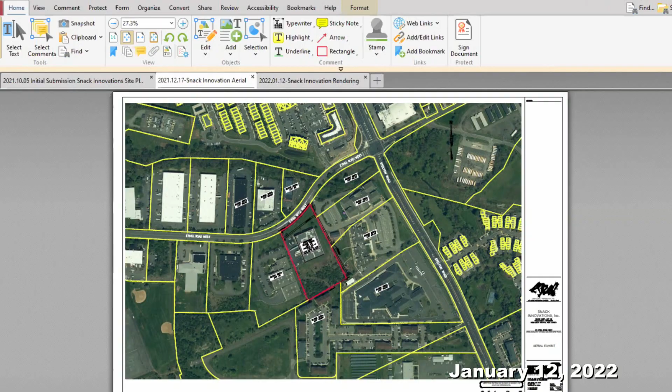Can you describe for the board the proposed building additions, development and infrastructure improvements under this application? Yes, so this second exhibit we're calling an exhibit rendering, number one, it's a colored rendering of the site plan that is in the site plan package submitted for the application. This is actually rotated 90 degrees. We're still on the first exhibit, the aerial. Did you switch it? Let me do that real quick.

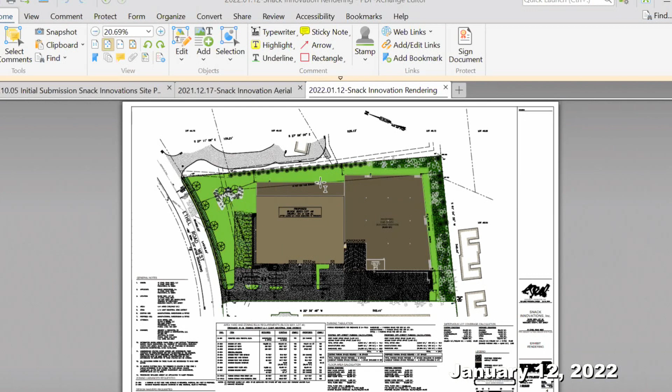All right, so describe the additions to the existing building. Are you able to see this now? Yes. Okay, good. So Ethel Road is running down, westbound down on the sheet, and we're basically adding...

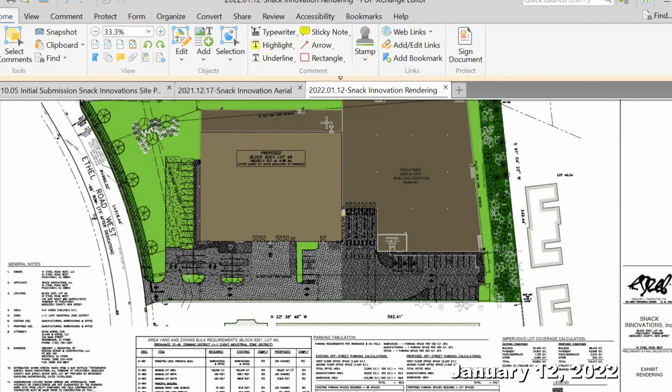51,019 square feet of new addition to the building, giving us a total footprint in the post-construction condition of 86,419 square feet. So this portion here, to the left of the building, if you're building from the street, is part of the addition, and then there's also an addition in the back, which is larger here.

There's a notch in the building midway back, which is for the new loading docks, so there's substantially more adequate circulation for the trucks. Typical distance from the face of a loading dock for the largest vehicles to the curb would be 130 feet. We're providing 135 feet now.

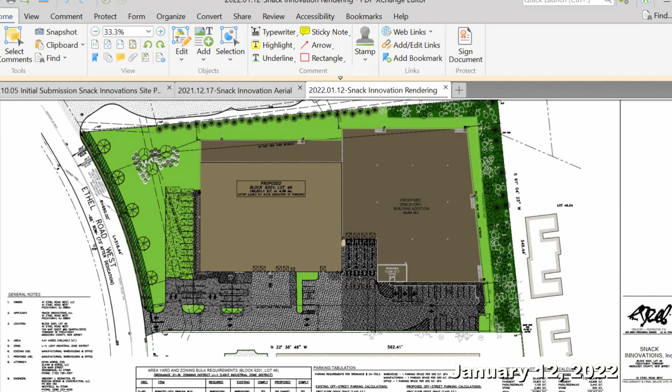Each of these 4 spaces now has adequate circulation ability. We're also adding parking. There's a reconfiguration of the parking here, which gives you 8 spots there and some spots in the back. We're providing a total of 42 spaces, with 15 remaining banked.

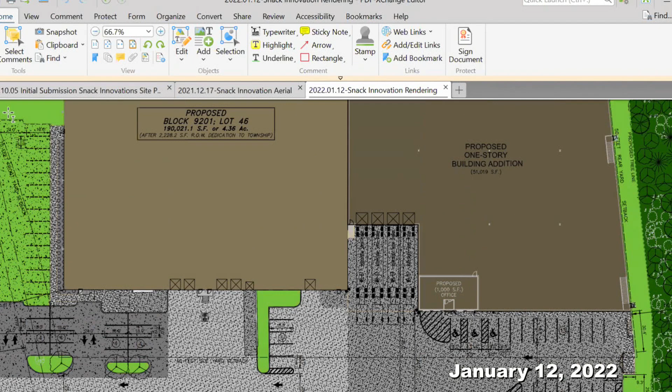So, total 42 spaces, 15 are banked. The banked spaces are seen here in the front shown as green. There are 15 spaces right here.

There are retaining walls proposed starting about this point of the site, back to the rear part of the parking area, in order to retain a good portion of the site. Since the site slopes from south to north, there's a good bit of earthwork removal that will occur. The building itself, its structural walls, will function as retaining walls, which is why you can see these interior stairs that allow people to come up off the warehouse floor and exit out through the building or enter.

We're adding a new 1,000 square foot office space in the new addition to supplement the 2 office spaces that already exist, which will remain.

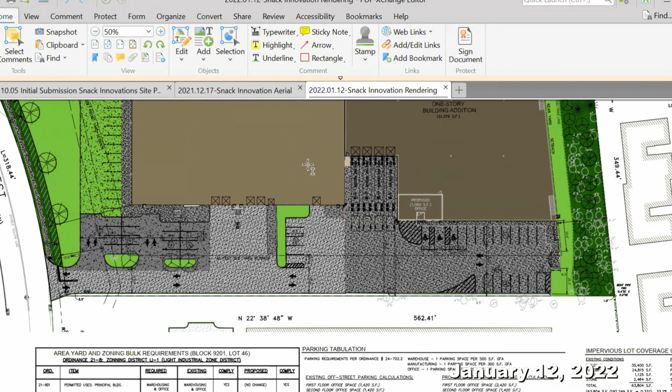The building breakdown: currently there's approximately 24,380 square feet of warehouse and 9,600 square feet of manufacturing, with 2,840 square feet of office, totaling the existing condition. In the net end condition, there's more square footage available for warehouse, 22,105 square feet of manufacturing, and 3,840 for office space. That's increasing warehouse ability by about 40,000 square feet and manufacturing on site by about 12,000 square feet, so it improves their ability greatly to function as they desire.

The site's been designed in accordance with NJAC 7:8, the state drainage regulations, which were recently updated in March 2021. We have to make accommodations for groundwater recharge, water quality, and water quantity reductions, and everything about our design complies with that.

We've also improved landscaping. We have several comments from the professionals about modifications in landscaping, which we believe will be no problem to accommodate in compliance with the resolution. We've added lighting around the site so that there's adequate lighting for the parking areas and loading and circulation around the site. That's the main gist of the improvements.

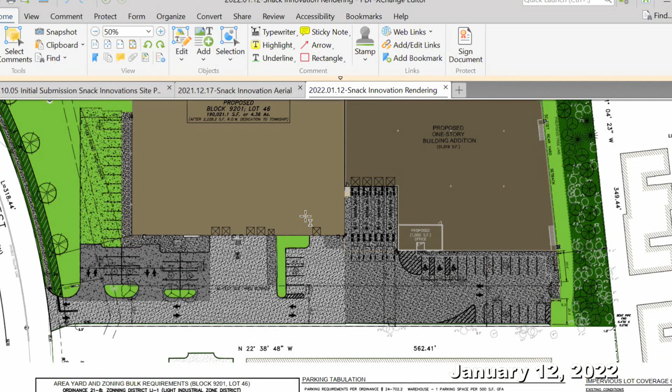Okay, I believe that handles that last memo. Madam Chairwoman, if there are any questions of Mr. Tyner at this point from the board, from the various professionals who issued the memos, we would invite those now.

Two things I might want to mention were the two variances, just where they're located. I kind of skipped over that, got a little discombobulated when the exhibit wasn't coming up. But the 40-foot side yard setback line is here, and there are two violations of that, but the more excessive is the 25.1 foot setback here. So that's where that variance comes in.

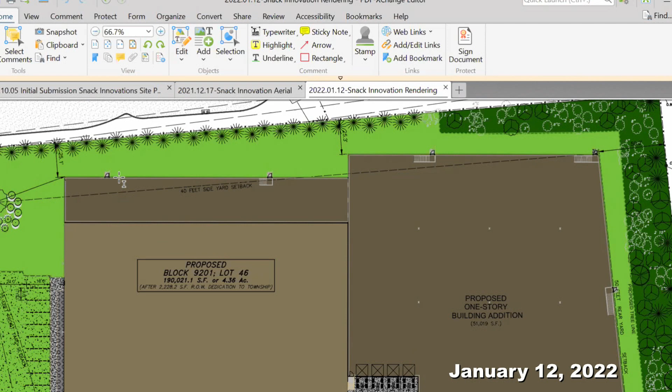And then the other is the building coverage, which is permitted at 45% of the site. And in fact, our original design was 45%, but with the dedication of 7 feet, it becomes 45.5. So really a de minimis overage, would that be your testimony? Yeah. Okay, thank you for that additional testimony.

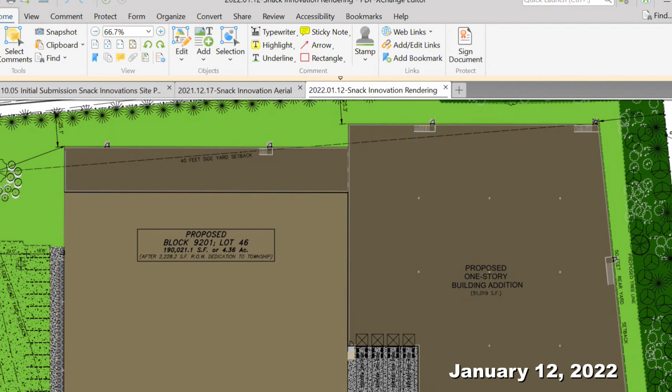Again, if there are questions of Mr. Tyner, he will also remain available through the entire hearing in case an engineering question comes up later based upon your further review or the testimony of other professionals. Board members, do you have questions of this witness? Mr. Tyner?

Madam Chair, this is Gabrielle. I did have just a couple of questions, and I'm going to start with the electric car stations. Mr. Tyner, you said that these would be, quote unquote, make ready. And with that, I kind of briefly looked over our ordinance.

I don't know if there's any detail, and if Ms. Corcoran wanted to chime in. When we close out after we do an approval, we make sure that all of the requirements of the approval are met. My question is if they're only make-ready stations, how do we approve an application where the electric stations aren't actually put in place and only the apparatus to then, quote unquote, plug and play?

I'm not sure if Dawn would answer that better. And I guess that question isn't really for Mr. Tyner, except to say that we may not want to land in that space. Maybe we will. I'll ask my other question now, which is, and I apologize if you already said it, did you agree to adjusting the street sign? And I apologize, Mr. Morse, if you had already answered that.

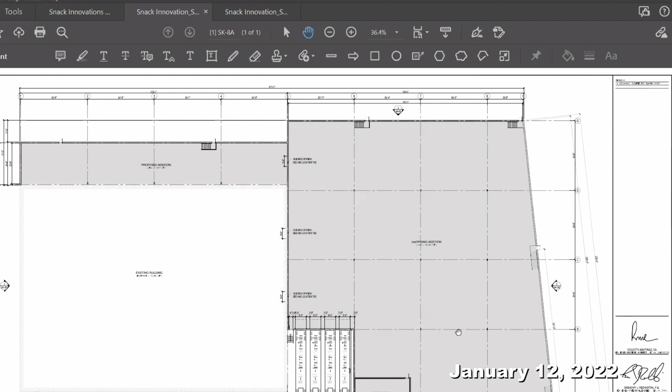Did you have a share screen rendering you wanted to put up while you testified? Let me share my screen. Can you see the screen? Yes, we'll call that A3. What is that? This is SK 8A, the proposed first floor plan.

This depicts the existing building in white, a portion of it, and depicts in gray the areas where we want to add. This is where the existing building currently ends, and we're planning to make an addition in this area to provide 4 loading docks, a small office area, and the rest allocated to some production and mostly warehousing.

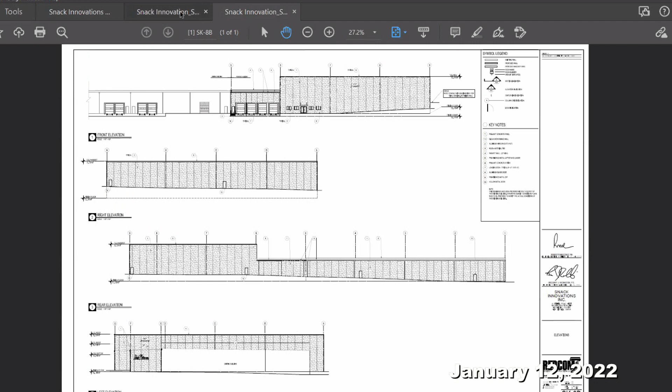Now you have an elevation rendering with some colors you'd like to share for the board, is that right? Yes, I have the renderings. This is the proposed view, if you look at the floor plan again, you see here the loading docks, that's the angle I'm taking. All right, so we'll call this angle A4 then. Yes, sir.

In response to the memo we got from the township, we're actually mimicking the existing building. The building is currently a 2-tone building, it has 2 grades, natural grays, one lighter, one darker, expressed with a stripe around a third of the building, where I have the cursor right now. This is where the existing ends, and this is exactly the same color paint and accents, which we're continuing to make the new building mix better with the existing, because our building is higher, so you'll see that difference between the two.

Now you also have another color rendering of the existing building, I think from the street view. Of the proposed, actually. I have another angle, let me go back to the first one, so the other is from this angle. Let me show you the render. Right, we'll make that A5, and that's what elevation? That is the right elevation.

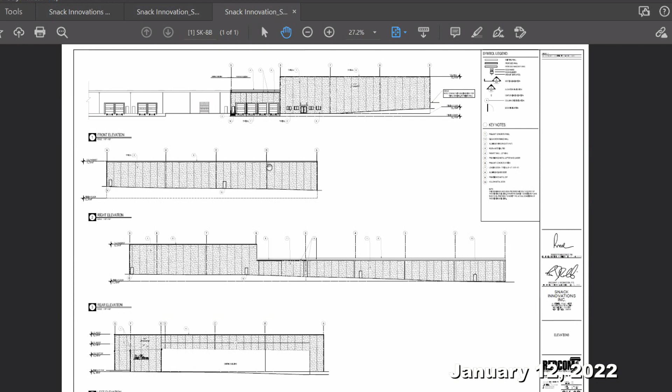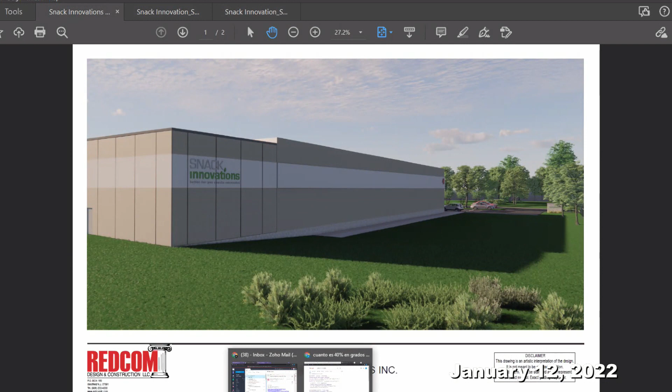Now, just so it's clear, we had two comments relating to architectural issues. One was in the CME memo requesting that the color scheme and materials of the facade of the proposed building be discussed, and that those color schemes be done so there's continuity between the addition and the existing building. Based upon what you described, you will maintain that color and appearance so there's visual continuity, is that correct? Absolutely, that's the whole intention of this. We are continuing the existing building.

That includes, there was another comment in the Piscataway internal house memo, that an accent band be added for aesthetic purposes. And of course we're prepared to continue that on the building addition as well, correct? Yes, you can see it on all four sides of the building.

Very well. So to sum it up, the building addition facade treatments will be neutral and designed so that there's continuity, so that the addition looks like the existing building so that it flows. Is that correct? Correct. All right, so I'd have no further questions of Mr. Martinez. If there's any questions of an architectural nature from the board or its professionals, we would invite them now. He'll also remain until the conclusion of the hearing in case something comes up.

I'm satisfied, there's continuity here. It's the way you look at the visual, it comes around the building. Thank you. Okay, great.

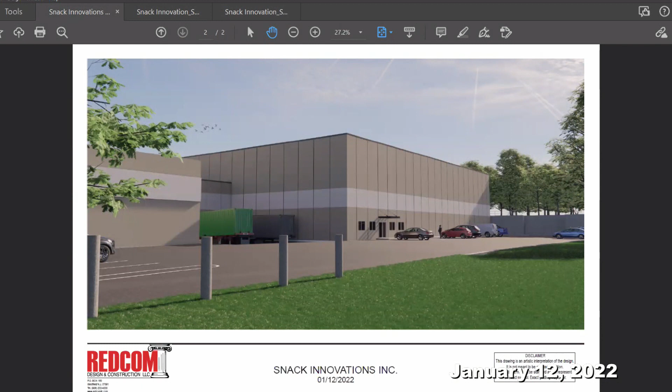Again, no further questions unless there are those of the board or the public. I would call my next witness. Madam Chair. Oh, you're on mute. That's right, okay. Does the board have any questions? Any other questions of this witness? Hearing no response from the board members. Did we open it up to the public for this witness yet? No ma'am. Ms. Buckley, would you open it up to the public please, to see if they have any questions of this witness? No one raised their hand, Madam Chair. Thank you, okay, you may proceed with another witness if you have one.

Mr. Martinez, you can stand down but stay on board. Next I would call John Ray, who is our traffic engineer. Mr. Ray, can you please raise your right hand? I'm not seeing him yet. I'm here. Yep, there you go. Oh okay. Do you swear that the testimony you will give will be the truth and nothing but the truth? I do. Thank you.

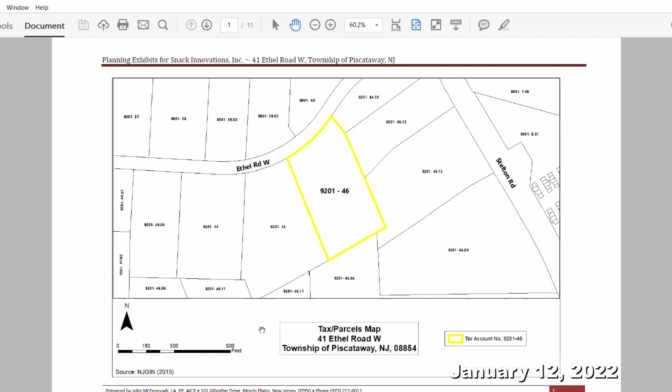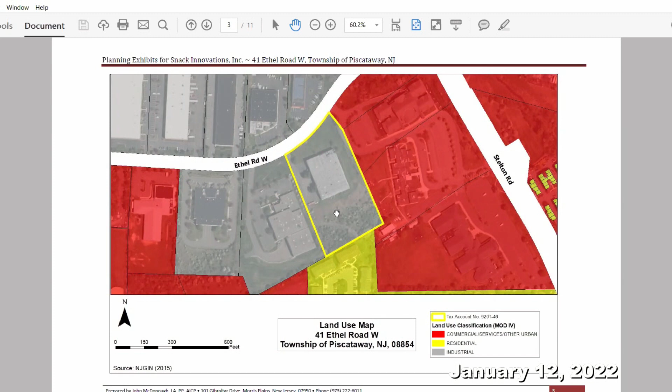So absolutely no relief being sought for what I'll call the edge, which is always a critical and sensitive area between non-residential and residential. So while the building is expanding, it is preserving the edge between those two land uses. Next, we're going to be on A9, which we're calling a zoning map.

This simply shows a reflection of the established land use pattern. Subject site in the middle, everything around us in gray is the LI1 zone district, where the proposed use has been both recognized as a valid permitted use and a lawfully existing use, and continuing as a permitted use as well. Importantly, we're dealing with an enhancement to a permitted use in the zone that has been here already—not a change of use. Now, immediately adjacent is your GB, general business district, and then backing up to that residential district, which does have a buffer requirement adjacent to it, which the applicant is complying with.

I'll go through the list of zone conformance, but you're going to see that there is substantial compliance here, not only with your use requirements, but also your bulk requirements as well that control the intensity of use on a piece of property. And you'll see the relief that the applicant is seeking here is really relatively modest.

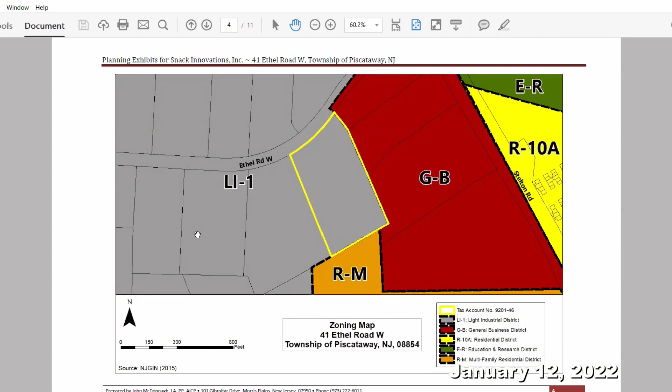Importantly, the applicant is going to put this addition off the back with the notch for four brand new loading bays that are certainly going to take the load off of this center point right now. So while we're not foreclosing the right to use those bays, certainly the relief valve is there by directing the traffic to a much more accommodating area in the back of the site.

So this is what you have there now. It's a building, the core is going to stay intact. The applicant is looking to put an addition off the back and then a small addition off the side as well, which again is going to be spot on with what is allowed from a zoning standpoint—and we'll get to that shortly—and also with respect to the bulk requirements, and certainly improved parking and circulation, as you just heard through Mr. Ray.

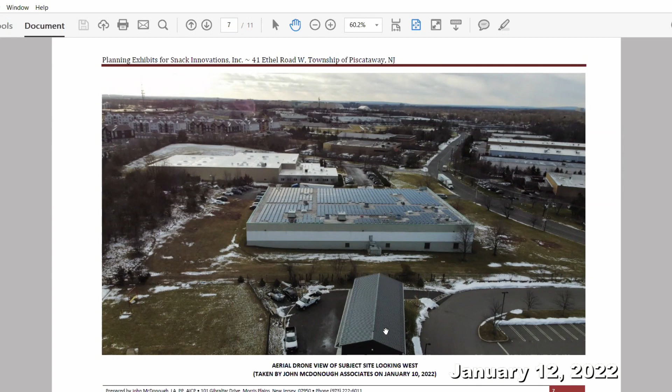I lost count—is this A12 or A11? A12. Okay, so A12, we're now looking west. This is the opposite view of what we just showed you, with Ethel Road on the right there, looking back at the building. This is the portion of the building that's going to come a little closer to the property line. Because of some pinch points that you saw in Josh's exhibits—not the full extent of the yard, but just little encroachments—the applicant is looking for relief there. It's going to be mitigated by landscaping, but it is essentially non-residential against non-residential. This is not an encroachment that's going up against the residential use, which would be to the left from this particular vantage point.

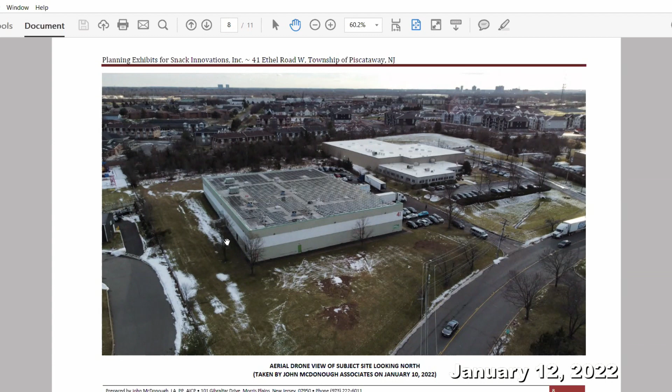A13, we've now spun around and we're looking at a view to the north. So we've got Ethel Road in the foreground here. Basically what you see in the front is what you'll get. The improvements are for the most part concentrated on the side with parking modifications and in the rear, and then on this side on the left here as well, where again we do have that relatively modest setback relief.

A14, did I skip one? A14? You're on 14.

A14, I just took the drone and pulled it back a bit to give you some context, looking to the east. Again, our subject building, with the adjacent building in the foreground, getting more of a sense of the surrounding landscape. I wanted you to point out one thing before you continue your testimony.

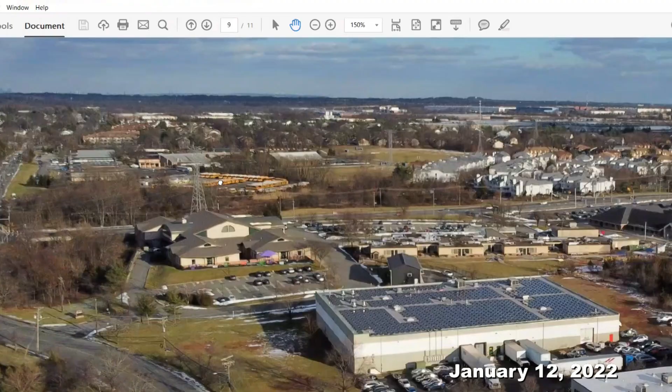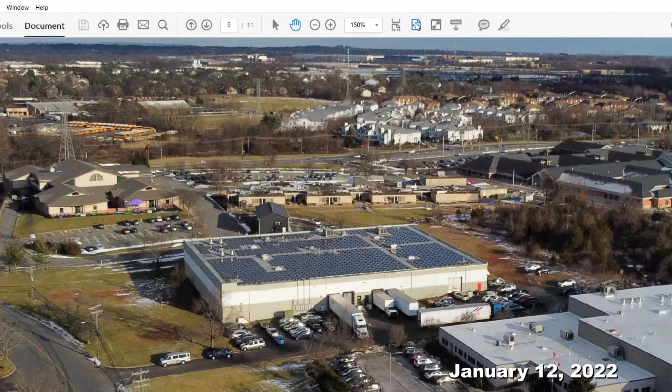The roof, those are solar panels, correct? Those are solar panels up there, and they're to remain. So we know Piscataway places high emphasis on green initiatives, and this is already cooked into the building that's out there. There were also great comments about EV installation, which the applicant has accommodated, which also goes towards the goals of green initiative. I'm not pointing at any other buildings, but the adjacent building does not have this. This building does, so I think that's an added benefit of this particular building.

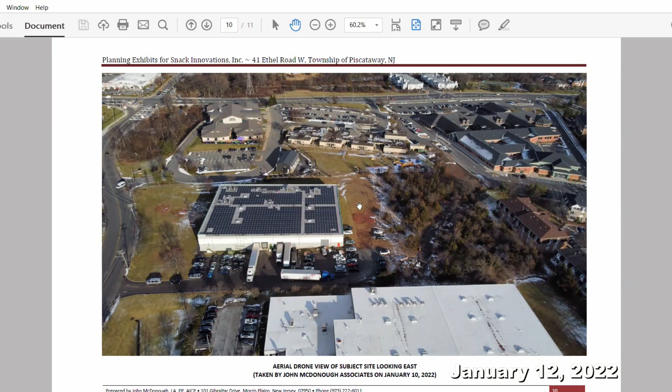Again, looking from the top, A15, second to last slide, just looking down. What Kevin just referenced with the solar panels almost covering the entirety of the rooftop. You get a sense of the parking and circulation, and how this is really going to open up the back of the site for improved operational efficiencies and circulation.

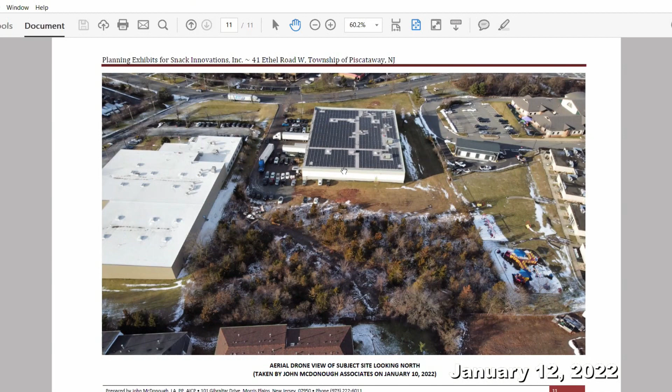And then finally, we'll close with A16, a reverse view from the back looking forward, essentially what the residents will see, preserving that edge, maintaining a similar edge to what we see on the adjacent property, and keeping the concentration of development compact and close to where the existing building is.

With that, I'll hover on this view and walk the board through the basics of the relief the applicant is asking the board to move on. Reminding the board, we're in the LI1 light industrial zone, and the stated purpose of the district is to reflect existing industries. This is an existing industry, and to promote non-hazardous operations, and this is a non-hazardous operation.

Along with use, the project is substantially compliant with the bulk regulations in terms of lot size, building height, and setbacks on the front and rear. The side you're looking at, to the right from the road, is also conforming. And importantly, the buffer in the back adjacent to the residence is fully conforming as to width and composition.

The relief sought here is relatively limited. We've got two bulk variances. You've heard about the side yard setback at its closest point, 25.1 feet versus the required 40 feet, which is not the entirety of the building but just those triangular pinch points that Josh showed you. It's certainly going to be mitigated by landscaping and the fact that we're dealing with a non-residential land use.

And then finally, the lot coverage is really just an uptick over what's allowed, 45.5% versus 45%, which I think would fall within the realm of a de minimis deviation that facilitates the benefits of the project as a whole, and can certainly be mitigated by the drainage improvements Josh is proposing here.

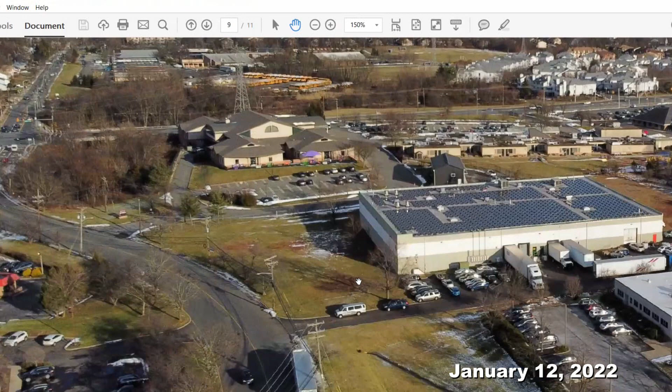And just for comparison, you get a glimpse of the site next door, which also has a similar setback to the road. Bear in mind, it's not a setback to the road, it's a setback to the right-of-way, which is also offset about 10 feet or so from where that neighboring sign is proposed. So we think there's good continuity with the established pattern out there.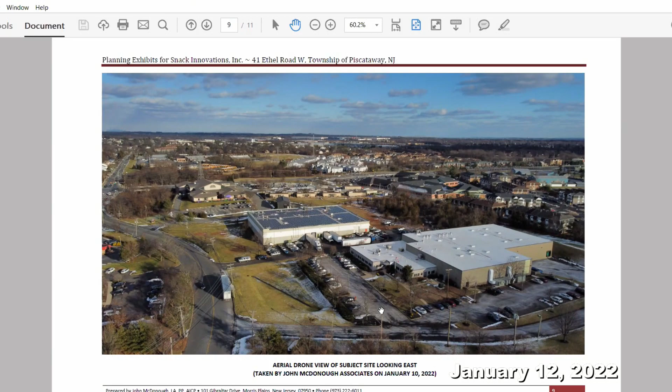And with that said, that's really all the relief that the applicant is asking the board to move on. Based on all the testimony, I think this is going to have a very positive investment in a permitted industrial use. We know that modernization has been found to advance the positive criteria by some court cases out there. Minimal relief, therefore minimal impacts. And with that, I'll finally get this thing off the screen and say that statutory criteria are met and approval is warranted.

So just to confirm, it's your position that any deviations would be substantially outweighed by benefits of this application, is that correct? Correct, under the balancing, yes. That the relief can be granted without substantial detriment to the public good or the township's zone plan and zoning ordinance, is that accurate? Yes, based on all the testimony on the record.

Very well. All right, so that's all that I have for Mr. McDonough. If there are questions from the board. Okay, board members, are there any questions that you have for Mr. McDonough or any of the other individuals who have testified who are still available to be questioned? Hearing no questions from the board, Ms. Buckley, would you please check the public to see if they have any questions?

Yes, there's an Eric Y that has his hand raised. Okay. Yes, this is, hi. Hi, Mr. Weiss. Could you give us your name and address, please? My name is Eric Yang. I work across the street, 50 Ethel Road West.

And my question to John or Alan is, with the new improvements, sorry about this, how would this alleviate the parking on the street?

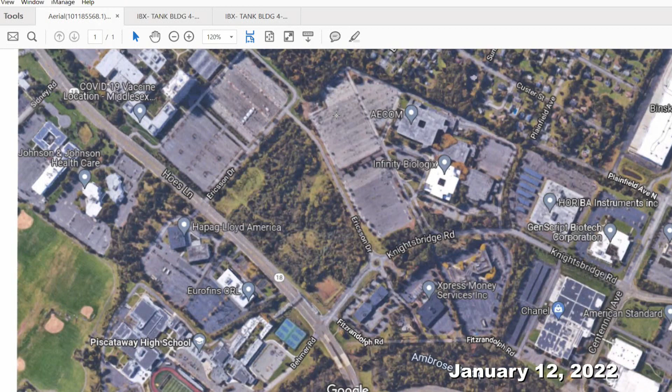Maybe it would be easy if I flip to this, the site plan exhibit. Mr. Butler, maybe we can mark this as A2. Correct, I think Mr. Duran, if you could walk the board through the site plan, which shows some of what you were just talking about.

Yes, well as you see on the key plan there, the area that we've hatched out is right there, where the tank is going, sort of tucked into the corner of building 4. And we have that entire parking lot before we get to this. The whole site on 3 sides is surrounded by similar type use buildings.

The 4th side, which is on the other side of this parking lot where your cursor is now, is a residential zone. The residences all have large trees that shield their view to the entire site, as well as the proposed tank.

In fact, the property next door has a very similar tank that we're looking to put in. Theirs is in the back of the building. Michael, I think you have that picture, can we bring that up? Sure, hold on one second. I think that's it, correct?

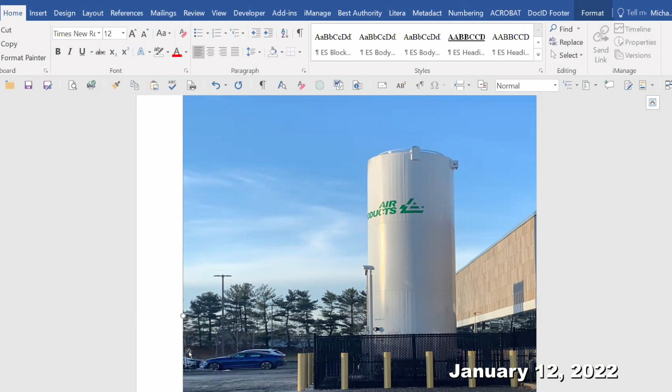So, Michael, if you wouldn't mind going back to the drawing there, and then over to the elevation on the left side of the drawing, the exterior elevation. Let's see if I can blow it up. Is that good? Yes, yes.

That's an elevation looking at the tank and the building, and you can see that the tank, we've dimensioned it at 34 feet, and the existing building there is 40 feet high.

So we're 6 feet under the height of the existing building. Okay, so the height of the existing building is approximately 40 feet, and the height of the tank will be 34 feet. Correct, that's obviously once it's mounted on the concrete pad.

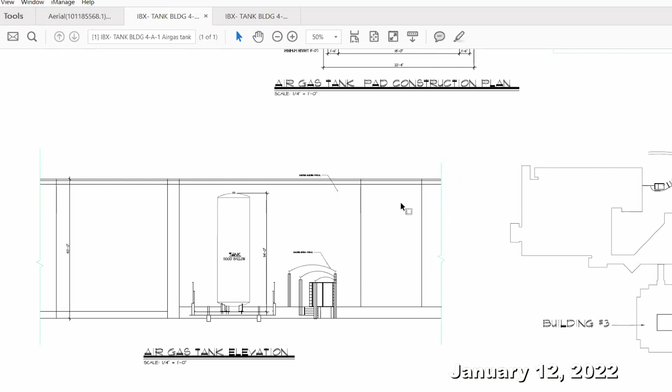And you said before there will be bollards surrounding the tank and a fence. Yes. Okay, and that's a sliding fence? Well, there's a gate. If you go back to the upper right construction plan, we show that in that plan. You'll see that. Yep, that's fine, either one.

You'll see there that the grade from the curb up to the building actually slopes about 2 feet or so. So we're going to have a block retaining wall around the tank on 3 sides, on the building sides, which also has a fence around it. Then on the parking lot side, there'll be a fence with a gate in it for servicing access and for filling access. The concrete bollards will go across that side of the enclosure and in between the curb and the fencing.

And you were saying before that in your opinion there's not going to be any visual impacts from this tank because of the distance from the rear of this property to the residential properties behind it, and also because it's in the rear of the building, away from the Knightsbridge right of way.

Well, you're certainly not going to see it from the road, and there are a few houses behind the property to the south that potentially would have a view of it, especially in the wintertime, because most of the trees that separate the properties are deciduous. So there'll be a handful of houses that'll have a view.

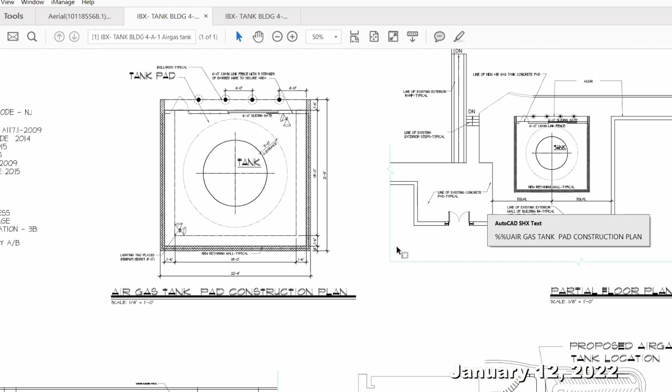No. Okay, and you identified it before, but just for clarity, because of the height of the structure being 34 feet, that's what triggers the variance request, correct?

That's correct. Okay, we did receive a few memos, and I just want to run through the internal memo from Mr. Hinterstein. It's dated November 23rd. Mr. Butler?

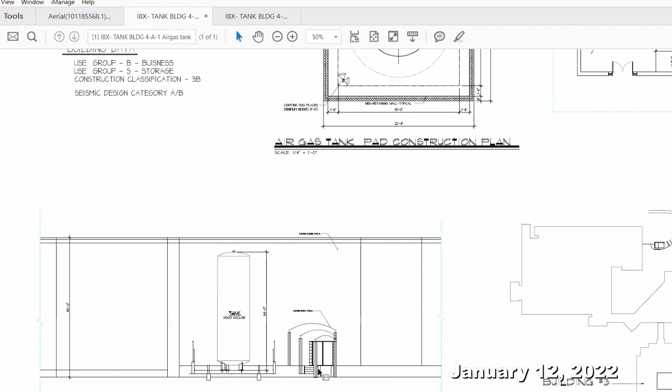If you want to just perhaps have Mr. Dorn address whatever Reverend Kenny's question was before you come to the staff report. Sure. Mr. Dorn, Reverend Kenny had asked about the mounting of the tank and how it's going to be placed out there on the property. You answered—excuse me, Reverend Kenny speaking—you answered, sorry.

My question was thoroughly answered, because I was waiting to hear how it was going to be mounted on a pad back of the building, the safety factor, and the fenced-in, gated with a lock and key. When the driver comes to fill this, he'll be able to see the pressure that he's putting into this tank. That's a safety feature that comes from Air Products.

Because I worked for Air Products prior to this, so I know how they mount the tank. So first of all, the young lady said you have the smaller tanks inside, feeding off of this 34-foot tank. Is that correct? That's correct. That answers the question. Thank you very much, sir. Sure, you're welcome. Thank you.

And just for clarification, this tank, the 34-foot tank, is outside and it would be feeding the nitrogen into the interior of the building for use in the freezers to keep the freezers at the correct temperature. That is correct, Mr. Doran? Yes, that is correct.

All right, if there weren't any other questions, I was just going to try to go through Mr. Hinterstein's review memo. Mr. Butler, I'm sorry. Yes, Mr. Butler, sorry, this is Dawn Corcoran.

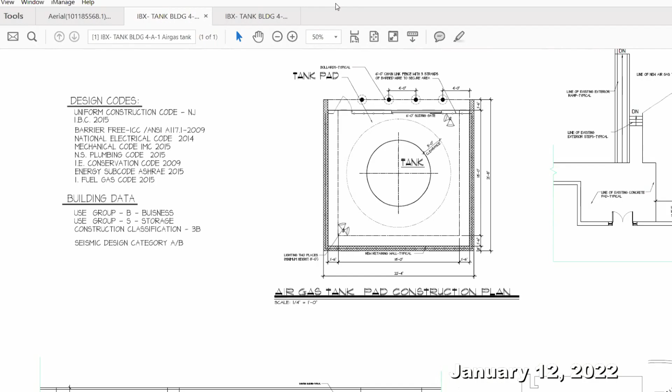I'm sorry, unshare, hold on. Thank you, got it, sorry about that. All right, so once again, this is Mr. Hinterstein's review dated November 23rd, 2021, in his site impact section.

Number 1, Mr. Doran, the fencing surrounding the tank will be black, correct? Yes, and there will be black PVC screen slats placed within the fence posts, correct. Okay, number 2, there is no barbed wire on the fence, correct? That's correct. Okay, I think that also addresses number 3, because the height of the fence, I think, is 6 feet, correct? That is correct.

Okay, and then number... I'm sorry, Mr. Butler, this is Dawn Corcoran again, I'm so sorry to interrupt. That's you, okay, no problem. Can you just confirm then the total height of the fence and the wall? It will not exceed 8 feet. Is that correct? That is correct. Okay, thank you.

Okay, number 4, the nitrogen tank, it will be white, correct? Yes. Okay, and just running down the rest of those items.

So items 5, 6, 7, 8, 9, and 10, those are really kind of items that Mr. Hinterstein wanted addressed, and the applicant, with the assistance of the property owner, is willing to address those items.

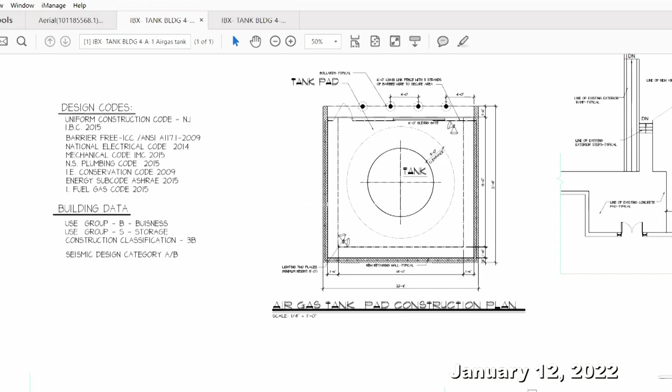I apologize, my computer, I'm having an issue with it, so I may actually be bumped off and have to call back in. Well, if I could share my screen, I have Google Maps. Here you go, if you can see this.

Where is that in relation to the parking lot? So this is the rear parking lot. The main parking lot would be on this side, and the tank is being placed right here in this outcropped corner. Mr. DiVincenzo, your property is right where I say proposed Airgas tank location, directly where I say tank in that area. Yep, understood. Okay, thank you.

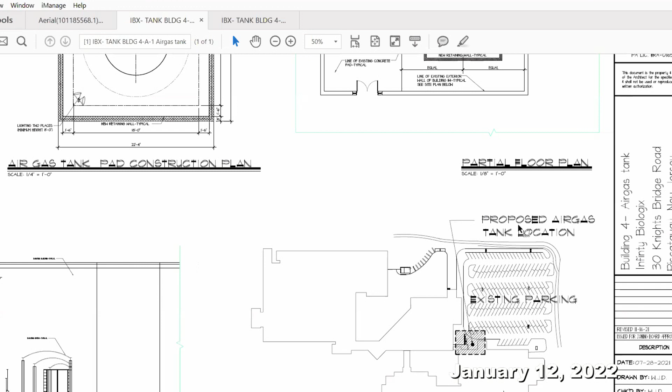And can you comment on the noise that's generated by the tank itself and by the filling of the tank? There is no noise, there's no noise, other than the dog barking. Understood, understood. Any other questions, sir? No, I think we're good. Thank you. Okay, thank you. Can we remove that from the screen, please? Yep, thank you.

Ms. Buckley, if there's no indication from someone in the public, I'm going to close it to the public now. And no one has their hands raised. Okay, thank you. Are there any further discussions from the board, or are you prepared to entertain a motion?

If I may, Madam Chair, this is Mayor Waller. I know Mr. Hinterstein is going to be working with the applicant, but Mr. Barlow, I would strongly suggest that we also sit down with the owner of the property, the company that owns the property, and deal with the berm in the back. The lady on Shirley Parkway was absolutely correct, that is a very mature berm that needs to be spruced up. I remember when that was built when I was a young kid, so it's been a while. Work between the applicant and the property owner, I think we can come to a favorable conclusion for the folks that back up. And I do know one of the other residents did contact me about, I guess there's still one of the parking lot lights shining spillage over into the property, and I think we can remedy that too.

Thank you, Madam Chair. Thank you, Mr. Mayor. So do we have a motion, or is there further discussion? Councilwoman Cahill: I'll make a motion to approve this application, provided that the applicant does abide by all of the variance suggestions that are on the report, and the landscape engineer, Henry, has agreed to all those, which I believe we've heard here on testimony. I don't know, Mr. Barlow, was there anything else specifically that we needed to note in the offer?

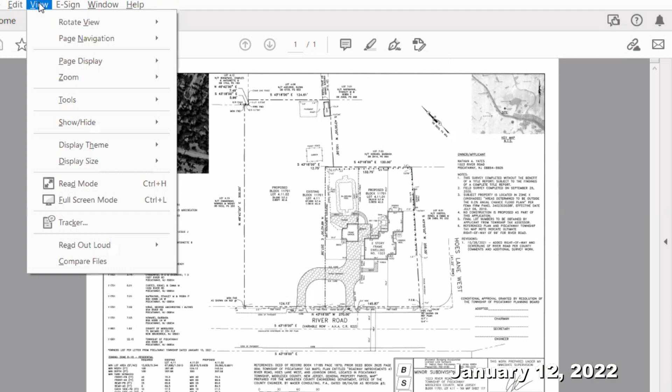I do need to address some confusion as to whether things are going to be removed or relocated, so to the extent necessary I'd like to have Mr. Yates address those. Beginning on page 4: the frame garage is 1.44 square feet oversized according to the ordinance, and Mr. Yates has agreed to reconstruct it to comply. Is that correct, Mr. Yates? Yes.

The other two issues are associated with a side setback and a rear setback for a small shed at the rear of the property, and you intend to relocate that structure, is that correct? Yes, that's correct, it's shown here. It's a garden shed, and I'll move it the proper distance away from both property lines.

And in your front yard, actually in the county right of way, there is a split rail fence. What have you agreed to do with that? There's a post and rail split rail fence that runs along River Road inside the county right of way, and I'll remove that, also as a condition of approval. Correct.

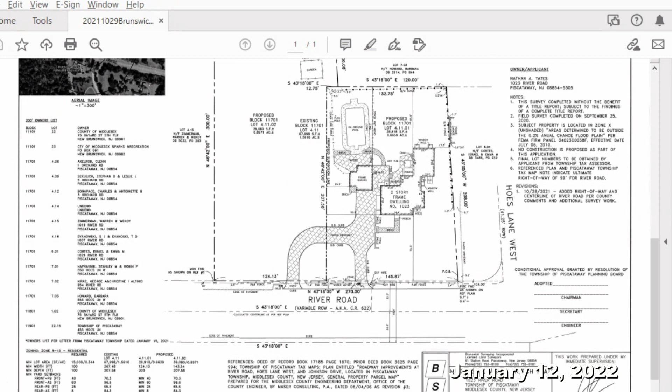So there will be no variance relief requested, correct? Correct.

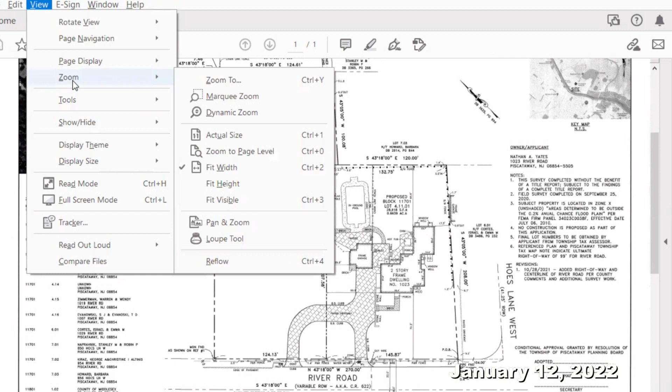Now the memo at 7E raises the issue of reconfiguration of the existing driveway. Do you have any plan to develop the lot to be created by this subdivision in the immediate future? No, I have no plans to develop this proposed lot in the immediate future. Would you be willing to reconfigure the driveway in accordance with whatever standards the building department of the Township of Piscataway may propose in the event there was a severance of ownership or a proposed development of the lot? Yes.

Mr. Barlow, the other points to be addressed in the planning memo are really post-approval issues, such as assignment of lot numbers, and the applicant would agree that they would all potentially be conditions of approval that would be complied with. Correct. The applicant will agree to them, correct? Correct. Yes, I think the last and final issue for this application really is the planning memo.

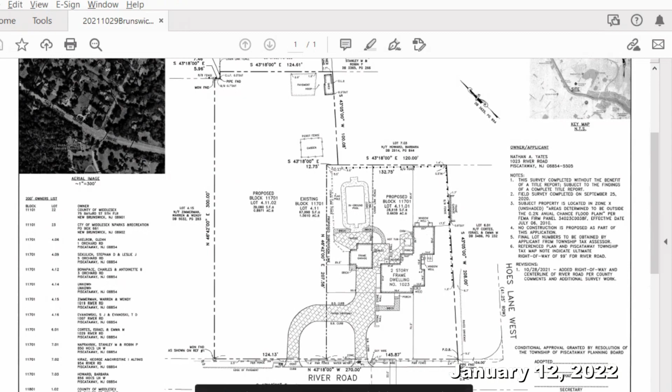Well, I don't have it, let me see if I have the ability to. I can share the letter if that helps. Oh, you can, yes, that will certainly help. Okay, give me one second. Dawn, have you seen the letter? I have not seen the letter. Okay, just give me one moment to get to that letter.

Okay, I'm presenting the letter from December 8th from Patrick Gorman. Would you like me to make it a little smaller? Can you see it? Or just scroll down so we could maybe read it real quick. Sure. I apologize for not getting this, but since it was addressed to Ms. Saunders, I assumed it was in the file.

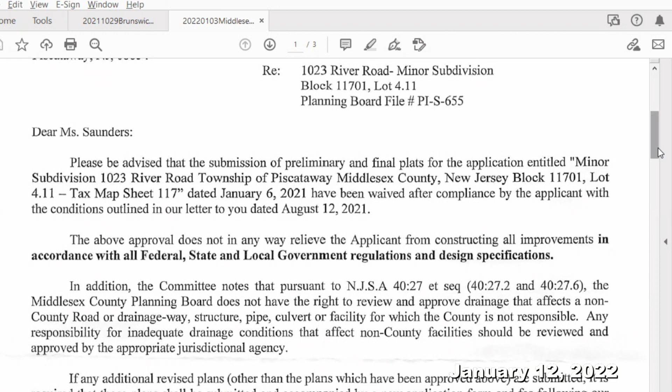Outlined. It makes reference because it says have been waived after compliance by the applicant with the conditions outlined to you, dated 8/12/21.

I don't know what letter that's referencing either. Nor do I, Mr. Barlow. So I don't know what was, it's saying you complied. I don't know what they asked you to do, I guess.

I'll tell you what they asked us to do is what was done on Exhibit 1, which was the revisions of 10/28/21 in response to the county's letter, which added the right-of-way and center line of River Road per county comments and additional survey work.

Okay. Well, normally, one of the conditions would be compliance with any requirements of the Middlesex County Planning Board. So if you've complied with them, that'll be an easy condition to meet.

And Mr. Zullo, if I may, this is Dawn Corcoran. Did the county have sufficient right of way? Is that what you're telling us? Or did your client need to dedicate additional right of way? No, there's no requirement to dedicate additional right-of-way. Okay.

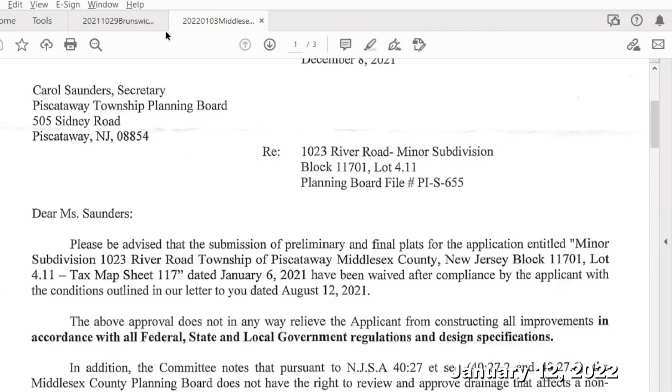The revised. Well, correct me if I'm wrong, Dawn, it's the 110-foot right-of-way out there, correct? That is correct. Well, I got to tell you, Bob, we always ask for whatever the right-of-way is out there. And as you know, the county's under engineering design out there to reconstruct that section of the roadway. And normally it's the town's job to get the right-of-way out there, and we're going to have the 55-foot half width.

And the applicant's not willing to provide it. Well, then I'm voting no. I'm just letting you know right now. And if I may, this has been the policy of the board with every application that's ever come before this board when it comes to the county right of way. You will not have my vote on that. There is no—

Bob, you're pushing water up a hill. This has been the policy of this board for 20+ years or longer with every application. And Mayor, if I may, if the applicant wants to hold back and rethink this, but I have to stand firm on this one. I've been very consistent, and this whole board has been very consistent for 20 to 25 years on this.

And Mayor, if I may, the subdivision ordinance is very clear with regards to sidewalks and with regards to widening of existing streets. It is a requirement, and as you said, not only are we looking for the easement, we are also looking for the installation of those sidewalks. And I really don't understand, I'm not trying to be difficult, I don't understand by what authority the Township of Piscataway gets to require installation of sidewalk within a county right-of-way when the county is not requiring it.

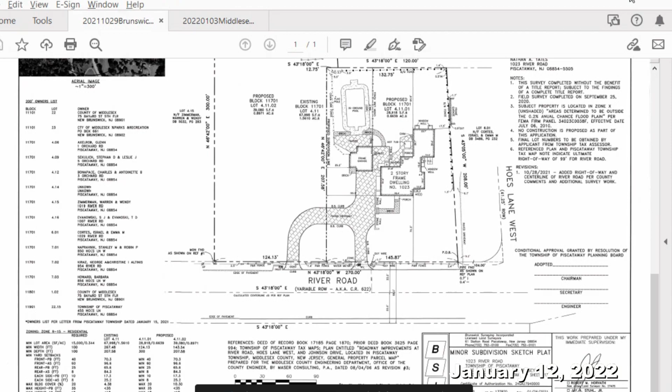Ms. Smith, if the board's amenable, then I think it would be appropriate to make a motion to carry and continue the Yates application, 20 PB06, to the February meeting. Can we remove this from the screen, please? Thank you. This matter is adjourned until our February 9th meeting.

Do we need a motion? I think that would be appropriate. Would someone make a motion to have this matter adjourned until the February 9th meeting? No, we don't have to do that, Madam Chair. Okay, I go by what Laura says. Yeah, we don't need a motion for that. Okay, just put on the record - Laura has adjourned it. Yes, that's right, we're good. Okay, thank you very much, gentlemen, then you'll be listed for the February 9th meeting.